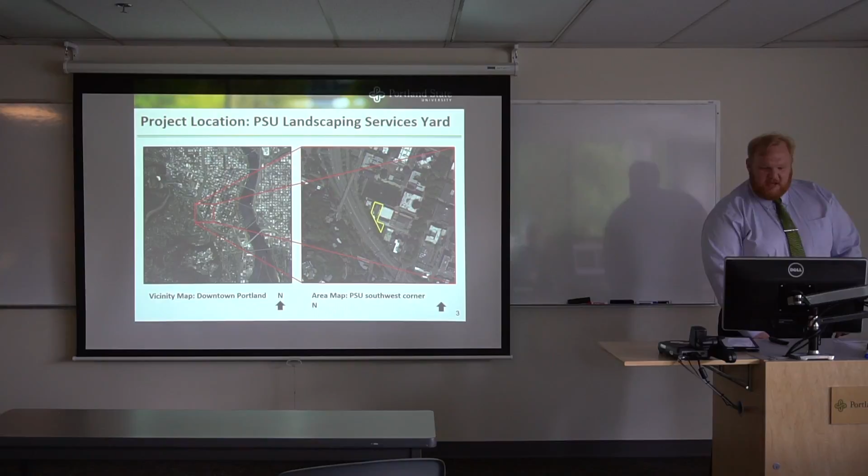Our project is located here on campus, same as Group 14's actually, they stole our thunder. It'll be located southwest of the library in the corner of the campus there, in the landscaping services yard.

Our stakeholders for this project will be Leslie Walters, the landscaping supervisor, Megan Schneider, the education coordinator for this project, and thank them for coming out, Anthony Bohan, a project manager at PSU, and Molly Bressers, a program development coordinator, and the Capstone Group 14, EQE, who will be building their covered compost bin.

So the site itself, as has been described, is kind of the headquarters of the PSU landscaping effort, where they store their vehicles, fuel them, keep the general supplies they need to do their job, and the waste, there's those bins in there. Also, they keep the general supplies, or will, the mulch, soil, and compost. We thought they were storing that in there already.

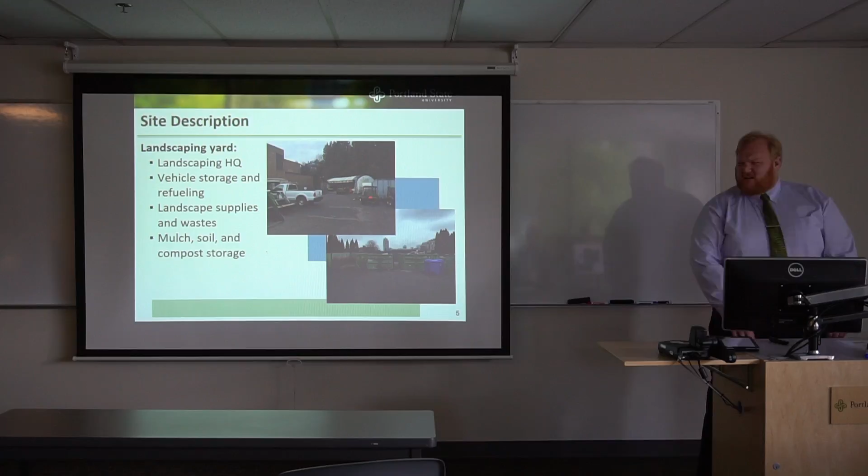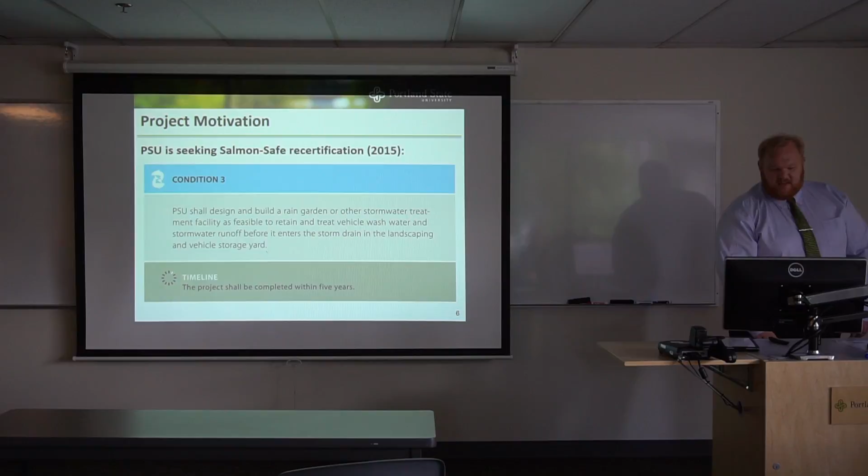The reason for this project, this is an excerpt from the actual Salmon Safe report. To be recertified as Salmon Safe, PSU is required to treat the runoff from that landscaping yard, the vehicle wash water, and the stormwater that gets all the grit in there. The original timeline for that was going to be 5 years. And as you can see, it was a 2015 report.

So just a general overview of what is going to need to be done. They're going to need to make some kind of water treatment feature to treat that runoff. We have decided the stormwater planter would be the way to do that, as it's efficient, economical, and ecologically sound, since it's for Salmon Safe. As part of that, they're going to need to regrade or repave the yard.

And then the covered compost bin project will be going in there as well, which originally had a deadline of 2017. And I'll hand it over to Dave. We'll talk about the project background.

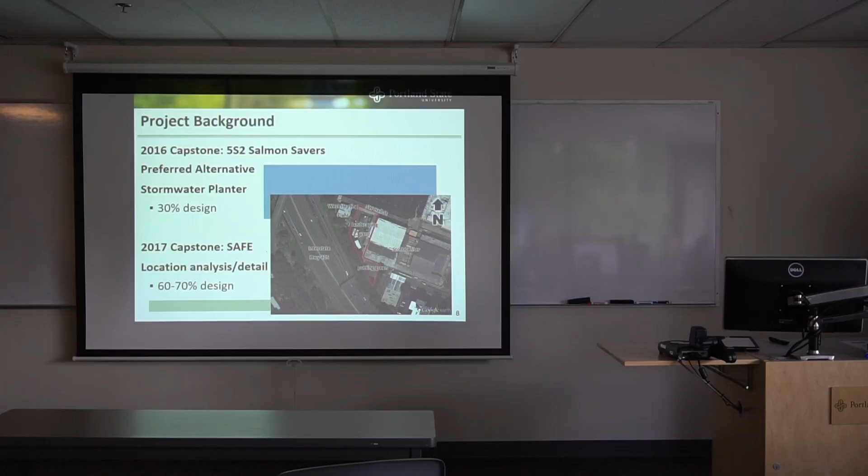Thanks so much, Alex. So yeah, I'm going to be talking to you about the project background, also get into the alternatives analysis, get into some of our assessment criteria, and then finally share with you the design we've been working on for the last 2 terms.

So, going back a little ways, you all know that this is a project for the CEE Capstone. Last year's 2016 group, 5 S2 Salmon Savers, did an analysis on 4 different types of stormwater treatment facilities, and they chose a stormwater planter as well, and they developed that to 30%.

So, as a part of the reconstruction of the Peter Stott Center and the landscaping yard retrofit, this project was run again, and we decided to do our analysis on location and a certain amount of detail of that location, bringing it to a 60% design.

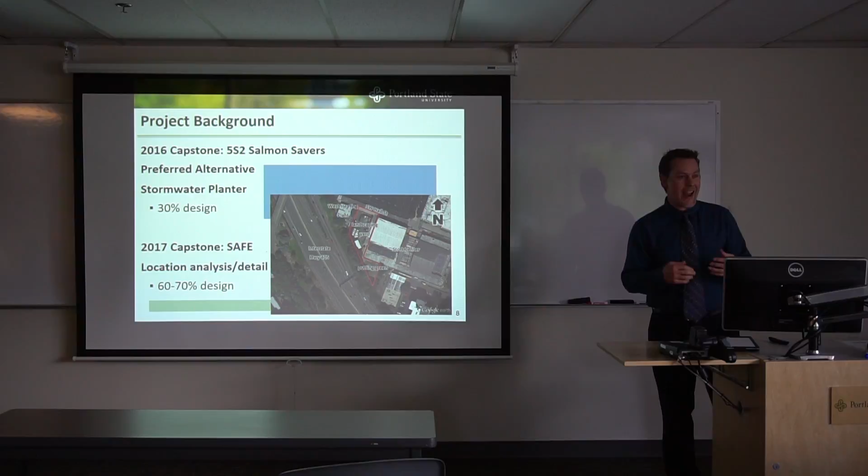Now, it was mentioned in the other group that we needed that access way from the landscaping yard over to the putting green, because in our first meeting with Leslie, he was suggesting that we were going to move those Conex containers over into that putting green. The schedule, I'm sure, is likely to change. There'll be a lot of pieces that need to be moved and reshuffled as a result of the landscape redesign effort, but that was one of the main reasons why spatial allocation was so important.

So anyway, a little bit more about the Salmon Savers 30% design. Their options were a pervious pavement. That was really costly. It did get 100% of the runoff, but it was about $18,000 to implement. A dry well just wasn't appropriate.

The vegetated swales and planters were actually very, very similar in their Pugh matrix determinations, but the planter rose above because it had a little bit better infiltration. Their estimated cost is $12,405, with an estimated 15 days to complete. I stated some of that already.

So I'm moving into the alternative analysis. The assessment criteria we used was, again, based on the spatial allocation. So we worked on cost, performance, geometry, maintenance, and setbacks and access. And some of these pictures show some of the major integral concepts that need to be oriented around.

So you have the storm drain, the sole storm drain that services the entire landscape, services the yard, there in the top left. And the picture to the right shows a lot of the different aspects that will move. The covered tent could move this way or that way. The Conex containers potentially over to the putting green. A lot of these meetings we had was like, well, you could go here, you could go here. A lot of things are in the air, right?

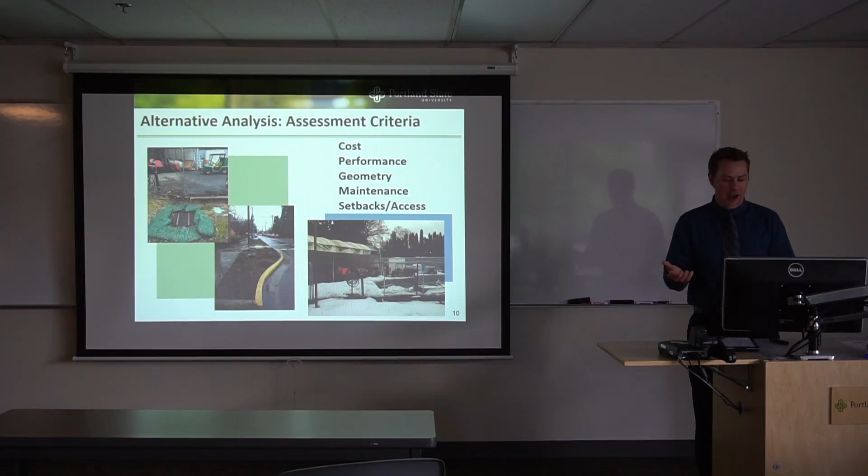So we then decided our 4 alternatives were based on placement, as I said. So we have 2 with north-south placement. They're shown in these little blue blurbs. They're in the top 4. And then the one in alternative 3 was an east-west placement, but that impeded the vehicular access of the road that would need to go over to the putting green. And then we had the south property line.

Our assessment criteria were based on, we scaled them 1 to 10, and basically a high cost was a low score, right? A low cost was a high score. We weighted everything based on the priority, and cost was definitely the priority, so we put that one at 30%.

Performance, we went on a flow path length, basically. So the longer the flow path, the better the score. We also went based on a percent runoff capture, which all the planters should capture more than 80% of the runoff. So then the geometry, we scored based on minimized space used as the top score. The middle score being maybe some issues with prioritization of space, and then the last score being significant issues with the prioritization of space, wasted space, or inaccessibility.

The maintenance was a lower score, because either way, we decided to do it based on hours per year, and 10 plus hours per year was based on regular weeding, mulching, and cleaning. 20 plus would be potential issues with compaction or foot or vehicle traffic, maybe walking out through it, and then all the way to mechanical failures from somebody backing into something and ruining one of the corners and such.

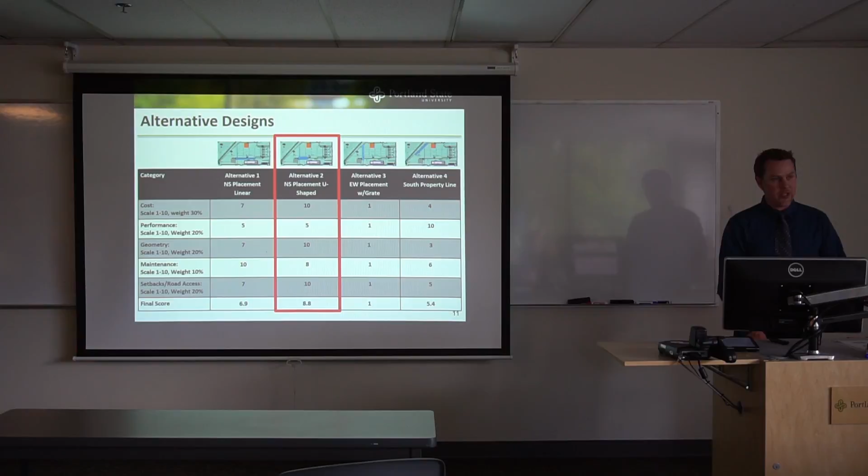So what we picked out of this was alternative 2, which was the north-south placement in the shape of a U, which yielded a compact layout with a longer flow path. This graphic up here shows where we hoped the planned compost bins would go, and then the little gray thing would be the planned generator, and the stormwater planters tucked in right in there.

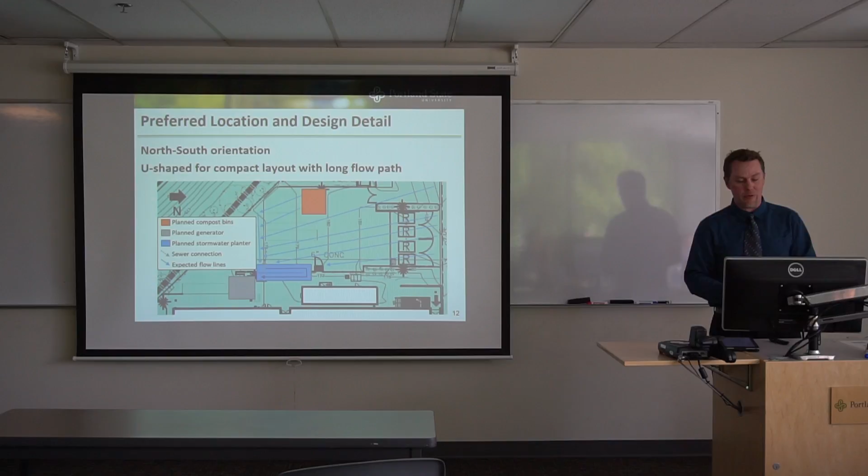The flow lines that you see here, we actually, along with the compost bin group, went out and did a simple survey to reconfirm the topography of the area, and we suggested that when the pavement gets regraded, to try and adjust the flow line so that the runoff goes through the compost bin and eventually is directed straight to the inlet of our planter.

So here's a rendering done by Chris here. That shows a little bit more, and he'll tell you more about it, but it's basically 40 feet by 10 feet, and I'll let him take over from here. All right, thank you, Dave.

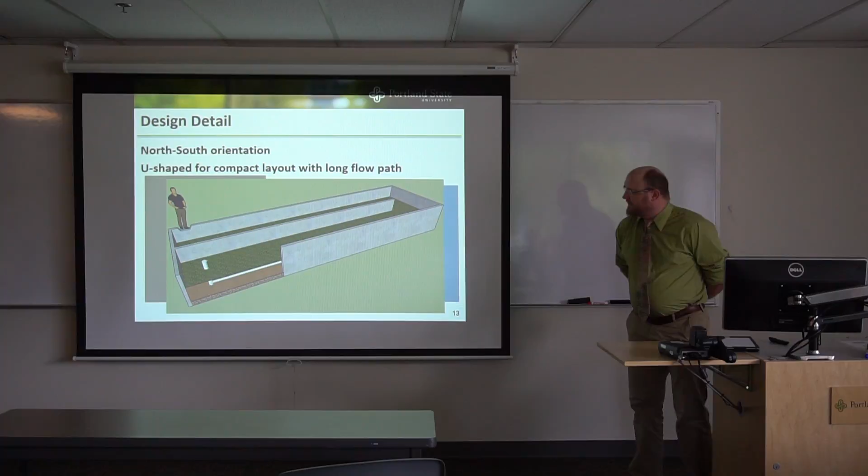So, as Dave was saying, we've got here a U-shaped planter. The primary differences here between last year's project and ours: that central wall, which provides a longer flow path for filtration, and we did some just minor adjustments in location and sizing to allow for construction and access to the new backup generator that's going in for the stock center, as well as the headquarters trailer there.

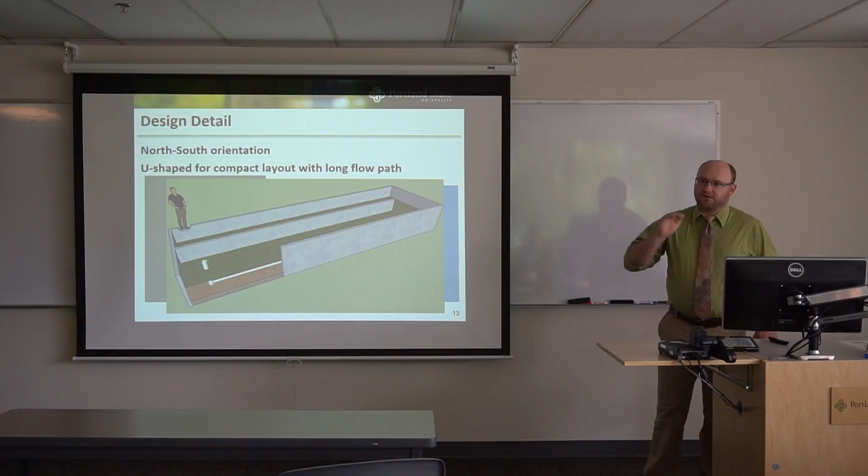As you can see, we've got layers of gravel at the bottom of this concrete poured planter. We've got a 4-inch Schedule 20 PVC perforated underdrain in there that then flows directly into the current storm drain system. The only reconstruction that's going to be required there is just the addition of a taller vertical, and then we'll fill with gravel, crushed rock, sand, and soil.

So a little more about the technical details here. Start off with the hydrologic analysis. The group last year did a small site analysis. We looked at the actual size of the site, including the potential new space and around the south corner, and saw that we needed to do what the Portland Stormwater Management Manual calls the presumptive approach. And so that uses the Santa Barbara Urban Hydrograph method to calculate the runoff. That's what we have here. What we found was great treatment, but poor flow reduction.

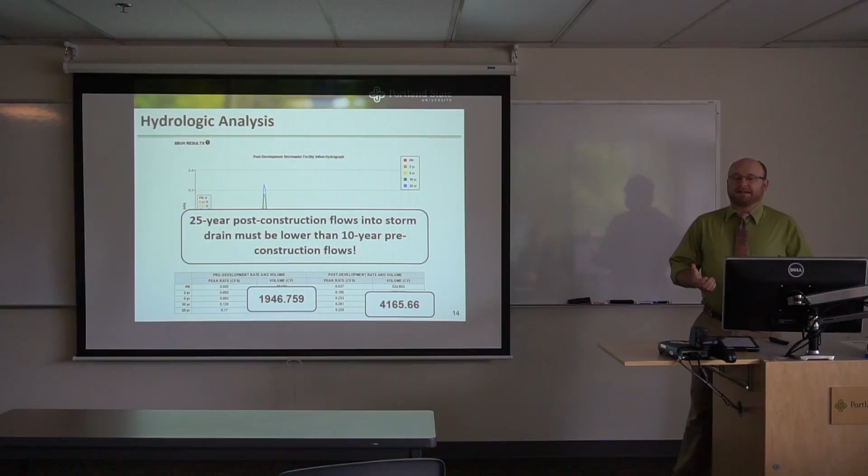I want to point out two numbers here. We've got the pre-construction 10-year flow volume and the post-construction 25-year storm flow volume. According to the management manual, that needs to be reduced from 4165 to below 1946. That's not going to happen with any reasonable sized planter that actually fits into the yard and allows you to continue to use it for its intended purpose. Anything less than about 10% of the yard area, anything that actually fits into the geometry of the space. So we pass those pollution requirements with basically any size planter. We fail the flow control requirements.

And so what we looked at next was, can we get away with using a flow orifice reducer to slow down flows into the storm drain and perhaps meet the requirements that way. Unfortunately, since this site is just under 15,000 square feet, again, the Portland Stormwater Management Manual says, no, you're not allowed. We have a minimum orifice size requirement of 1 inch, and we don't believe that's going to take care of your problem for a site this size.

So what we do have instead is for private owner initiated stormwater retrofits, they will allow for exceptions. Basically, they're happy if you do anything at all to improve your site. So what we can do, we can submit a waiver request form and say that, look, we're getting this pollution treatment, but we can't meet the flow control requirements, and they should allow for that to go through. The important thing to remember is that we do at least very thoroughly meet that salmon safe motivation of cleaning up the water.

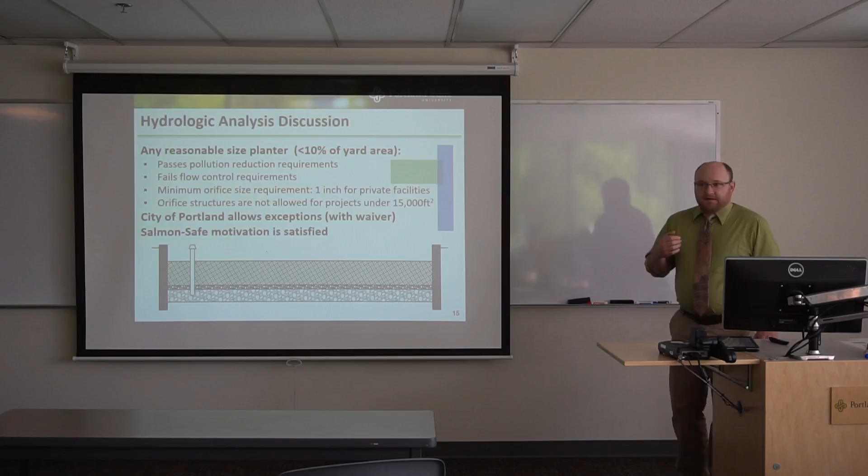So, to speak a little more to the filtration aspect, let's talk about the soil and plants. City of Portland, again, has very strict specifications on pretty much all of this. The stormwater facility blended soil is a blend of loamy soil, sand, and compost, 30 to 40% compost. We've got a vendor and hauler list available. We'll set you up with that. Since this is a private facility, the city does not require testing or submitting results of that test to them for the permitting, unless BES looks at what you're doing and says, I'm not so sure about this, and asks for that specifically during the permitting process.

As for plants, we would suggest something along the lines of a mix of Juncus, Deschampsia, and maybe a little iris in there to cheer you up on the spring mornings. Those are all three native plants, well proven in planters around Portland, and we expect that they will do a great job of filtration as well with all of those fine vertical stems.

So a brief discussion of budget. Anticipated budget again was around $30,000. As for the compost bins, but as requested, we wanted to keep it as low as possible, given that this budget is not actually currently allocated and we don't know where the money is going to come from.

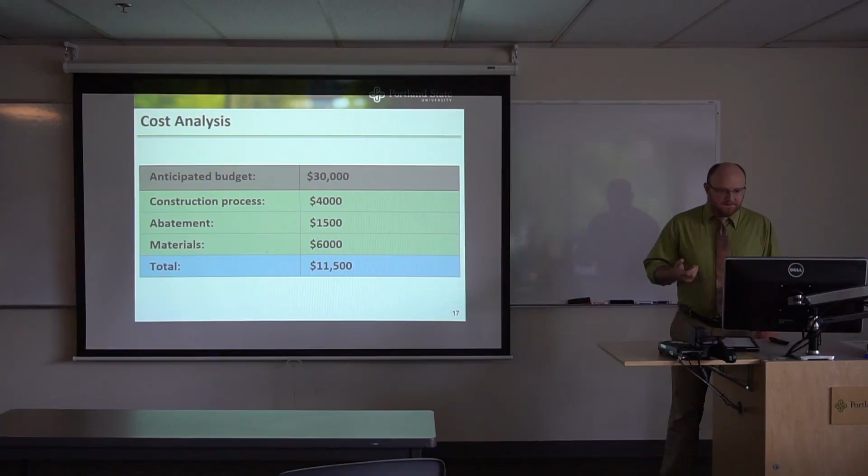Those are the permanent materials that are going to make up the substance of the rain garden planter. And that will total up to about $11,500, which is about $1,000 less than last year's group predicted, and well within the budget.

So a little bit about the scheduling. Don't try to interpret that drawing, just understand that it's about 3 months long. We've got, starting at the top there, permitting, setup, preliminary grading, and then excavation and framing, pouring, filling that planter. Then of course back out to the bigger site, grade, repave, and inspections. We're looking at about 16 days, 3 work weeks for the planter portion of that schedule.

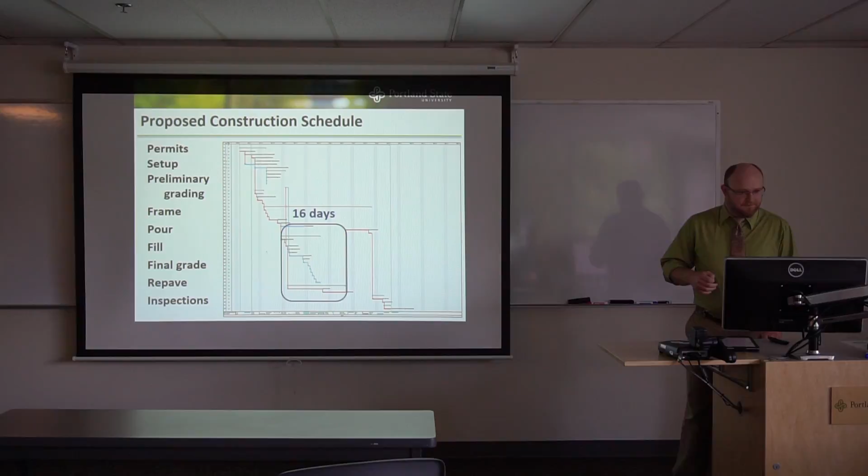And we'll just need to be careful to make sure that the framing is completed as quickly as possible to allow for the curing of concrete to proceed and make sure that everything stays on schedule that way. So, given all the uncertainties and changing circumstances, we really wanted to make this siting as flexible as possible and the design as flexible as possible. That's part of the reason as well for going with a planter over a swale.

You can use a smaller area that's up against the building, no setback requirement for a lined planter, and so up there right as close to the stock center as it can get. We stay out of the way of most of the major renovations, so you can take care of things in the order that you need to. So, all that being said, do we have any questions and feedback?

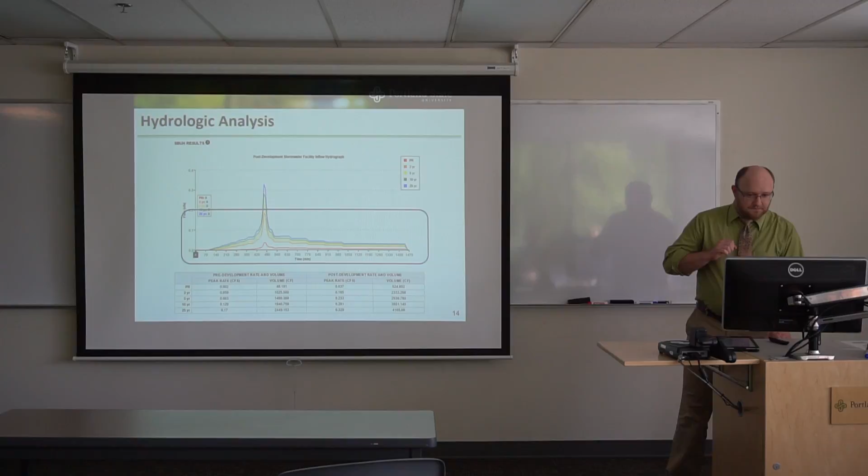Yes. Great job. Did we take into account the drainage from the possible putting green? From the putting green, so we did 2 separate calculations. One for the majority space, the current in-use space, and a separate calculation for the putting green. Because we didn't expect that the putting green drainage would be routed around the corner into the planter, that was part of the thought behind the alternative 4 here. Oh, okay. It was that you could more readily route water to there from around the corner and the putting green.

That being said, that planter location would butt up against fencing issues that you've mentioned, survey problems, as well as just taking up more space at the back edge that could lead to some wasted space issues. So, I guess the answer to be brief is yes, sort of. Sort of. Yeah. Totally. No worries.

What are the maintenance requirements for a planter like this? Right. So my master's thesis down at OSU for the past couple of years has actually been working on maintaining one of these facilities along with all of the instrumentation to measure what's going on in it. The primary thing is just trimming once a year, going through once every 5 years or so, and dredging out any silt that's accumulated on the surface.

We do expect to have some considerable sedimentation. We are looking at a sediment trap right at the entrance to reduce the amount of shovel work you'll have to do and make it just more of a lift that tray up, dump it, and stick it back in. Aside from that, remulching and just occasional watering in the summer, which you can accomplish with an irrigation system. It's pretty low maintenance, especially once the plants are established. Those natives really take care of themselves for the most part.